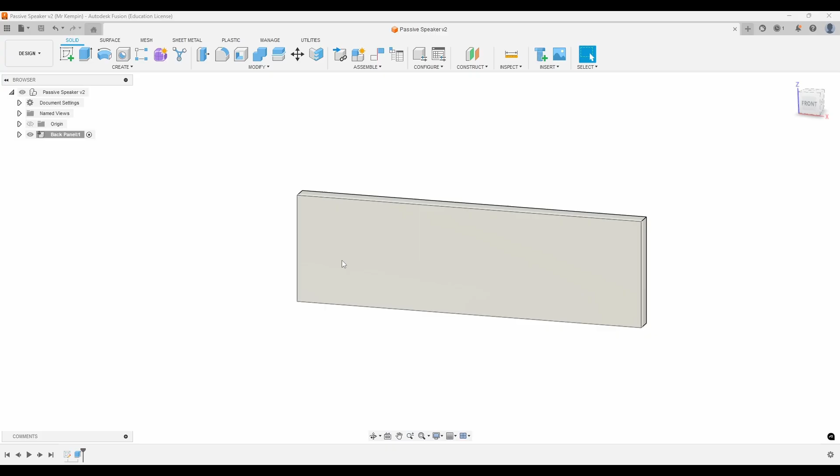The internal parts give it its shape and structure, bits that allow the sound to travel from the phone to the two separate chambers. These are really important, but they're also going to create spaces, so we've got to be accurate with this.

We're going to need quite a few parts to do this. Now you could in theory do this in one part and maybe break them down, but doing that does have risks, and we need to look at how we're going to make each separate piece in real life.

So we need to look at the components. Now last time I mentioned that the active component is the one we're working on, but that didn't mean a lot because we only had the one component. So now I'm going to go back to my passive speaker, select the whole assembly, and now I'm going to press new component.

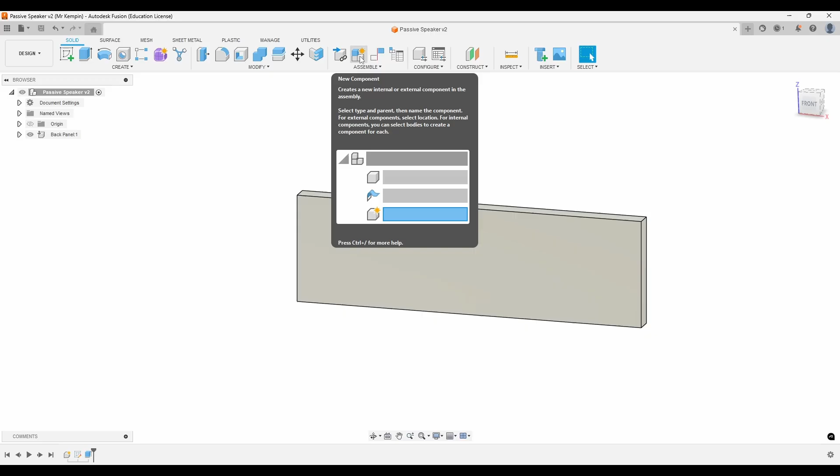This is really important that I do that first, because if I'd left back panel as my active component and pressed new component, it would have appeared inside the back panel component, which would have meant if we wanted to move it around or join it anywhere, we wouldn't have been able to. So my new component, which is going to be spacer 1, appears below back panel, not inside back panel. That's really, really important. This is one of the most common areas that people get confused with and get wrong. So make sure that these are separate components here, not dependent upon each other.

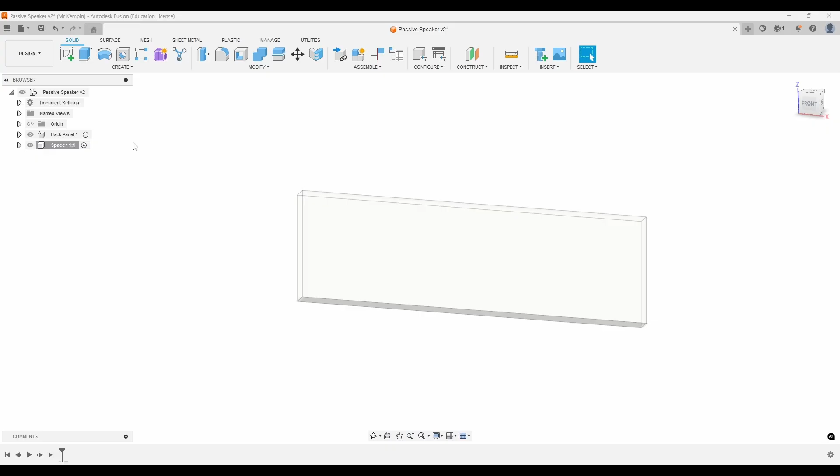So we need to make the first of our spacers. We're going to do the quickest and easiest one. I'm going to start with a sketch again, sketch on my front plane, and I just need a rectangle, and I'm going to do it below. It doesn't matter where you do this—you could do it on it, above it, left, right. We're going to move it around straight afterwards, so it doesn't matter.

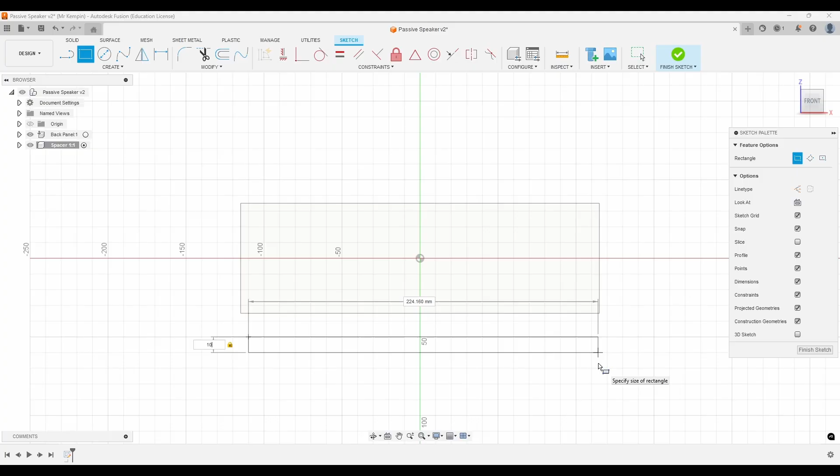What matters is that this height here is 10, and this width here is 230. I can now finish my sketch. I'm going to extrude it, extruding it 12. I just typed 12, and then I can press enter.

I'm done. So it's the same technique that we used for the back panel in the previous video. We're going to be doing a lot of that in this video. There'll be a lot of repeating that, but we'll get that skill drilled in, and that's really important—that's one of the things that I want to do with this, is get those basic skills drilled in.

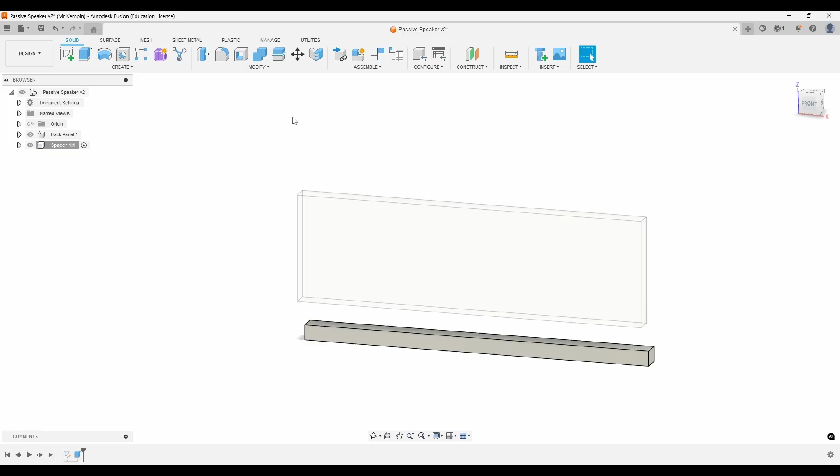So I can leave it with this as the active component, or I can go back to this one for the first thing we're going to do, which is a joint. You can go to assemble and then joint. I like to use the shortcut J. Just press J on the keyboard and everything becomes active, and it says, right, we're going to join them together.

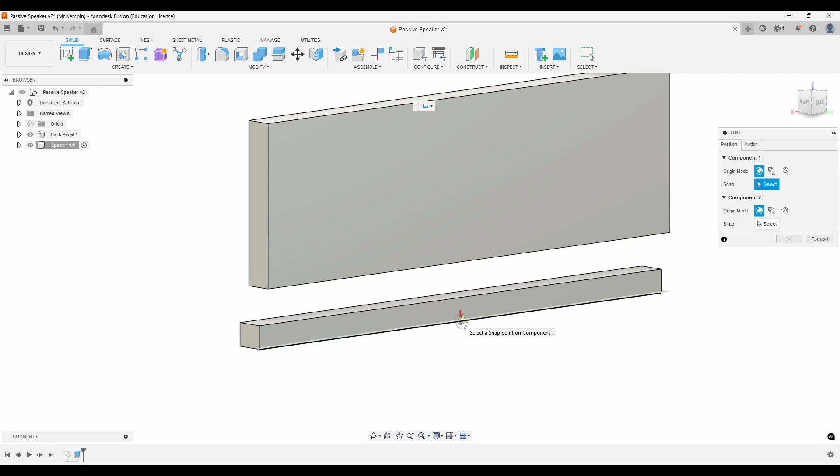So component 1—well, I'm going to swing around behind. I'm going to hover over this. I haven't clicked anything yet. Now what I want is that node there. If you're further away, it's sometimes hard to snap to the right node, because even though that's the right node, it's on an edge, not a surface. It has to be the surface for this process anyway.

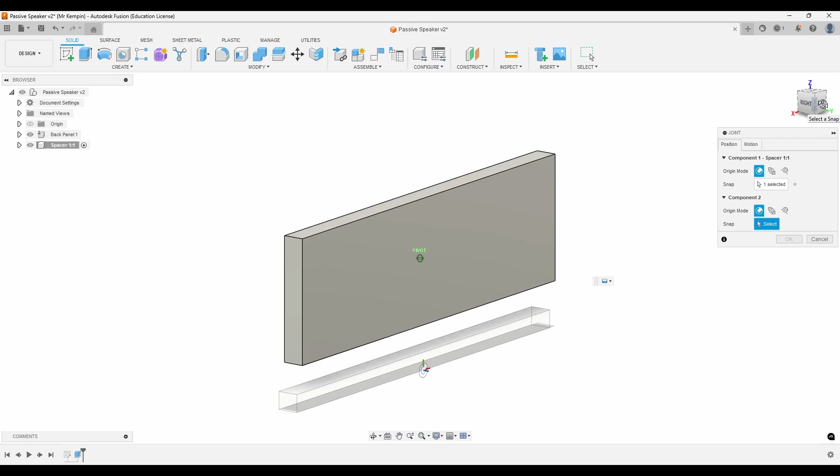So I'm going to zoom in much closer. I'm going to click on the surface, and then my mouse will only move to the nodes. Look, my mouse is quite far away from those nodes, but I'm moving up and down and selecting between the nodes, so I'm going to make sure it's that node I select. I'm then going to spin around. If you're wondering how I'm spinning around, you can either click on this directional block at the top and move it around.

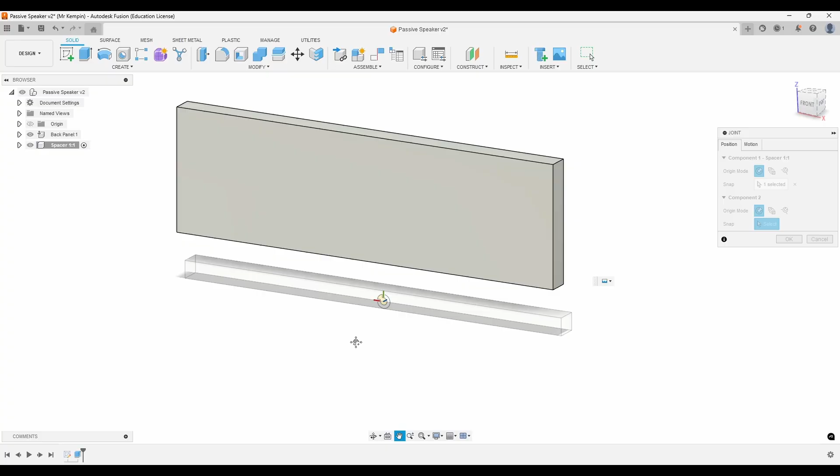You can press the orbit button down here and click on the screen and drag it around. Or you can hold shift and middle mouse button down, that's a shortcut to orbit. If you hold middle mouse button on its own and move it around, it's a pan or drag. Shift and middle mouse button together and you orbit.

For my next point, I'm going to snap to this one here. I'll zoom in a bit closer, click on the surface first, just for good practice, and snap. That is attached, and it goes back to being spacer 1, my active component. That's that bit done. We need to do this a few more times now for the spacers to go round the outside, up the middle, and so on.

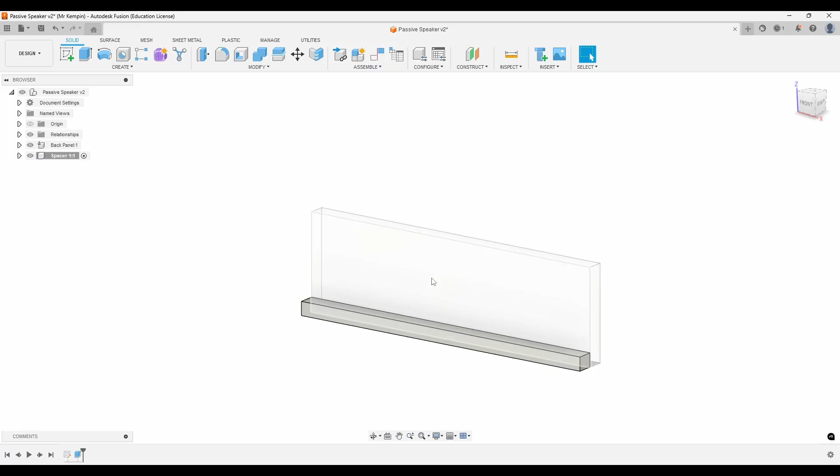Select passive speaker up the top there, make the whole thing active. One of the things I'm going to do now, because it bugs me, is click on open up relationships, where it says joints, this little annoying box here to show there's a joint here.

We don't need to see that at the moment. Maybe if we need to figure out which joint is which later on, because something's gone wrong, we can activate it. But I'm going to make that invisible, just hide it. The eye icon is a visibility icon. Doesn't mean it's not there. I can't physically move it, I can click and drag it, but it's not going anywhere because they're joined together. It's just not visible.

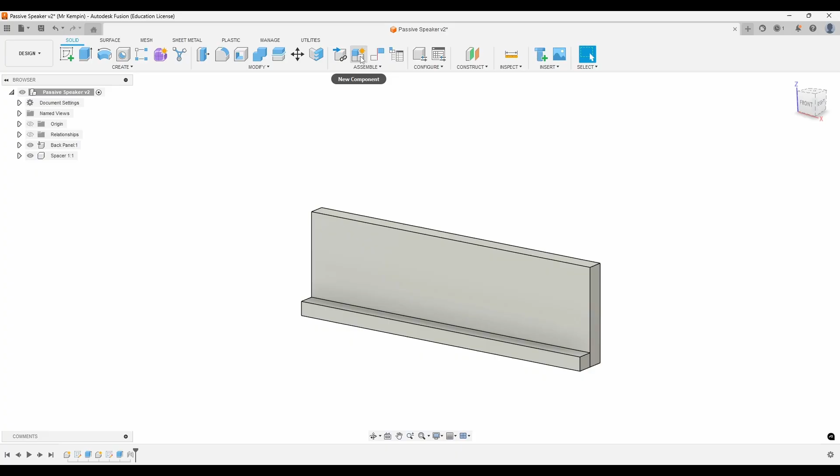Okay, I've got my passive speaker selected. I can now press new component. This is going to be spacer 2.

Now spacer 2, we're going to start doing the side ones. I'm going to do the one on the left hand side up here. So I need a new sketch. Doesn't matter what plane it's on, doesn't matter where I do it, but I'm just going to do it on the left because that's where it's going to go. It's going to make it easier for me.

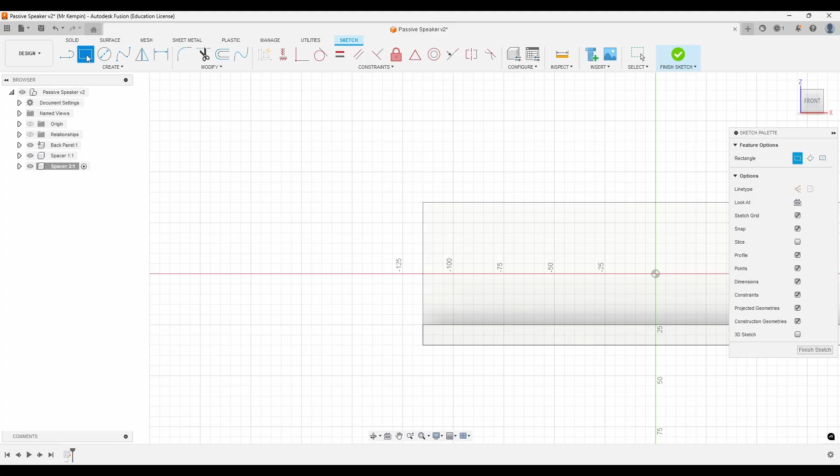Rectangle tool up here, shortcut to that is R. I'm going to draw my rectangle, and I want my height to be 50 and my width to be 10. And that's it, I can finish my sketch.

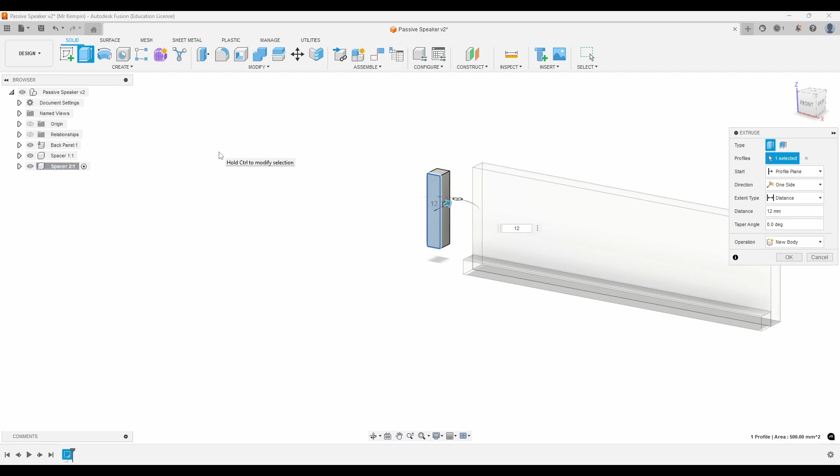I can press extrude up here, the shortcut for extrude is the letter E. So if I press the letter E, I can type 12 and press enter. That's nice and simple. I can now press the shortcut J for joint, or I can go to assemble and joint, and I can select.

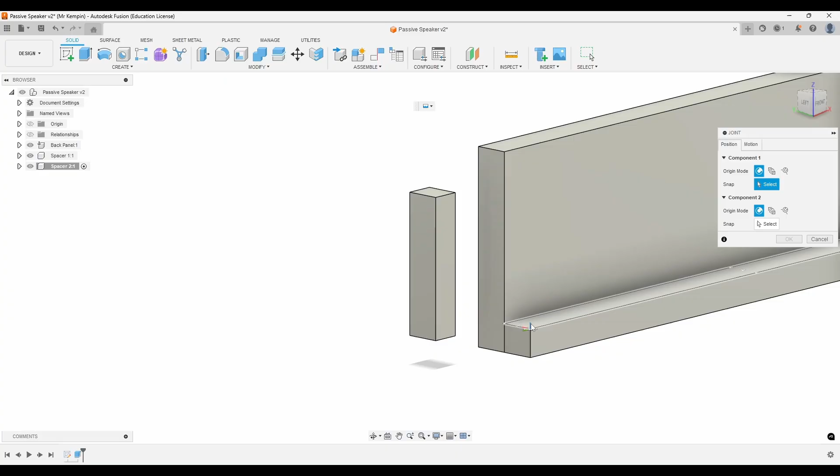Now we want this on here. Let's not assume that the middle is the middle, because we don't know yet. I do know, but we won't assume that. We could always joint it here. So I could say I'm going to joint this bottom surface and this node here, to this bottom surface and this node here. And that fits in there.

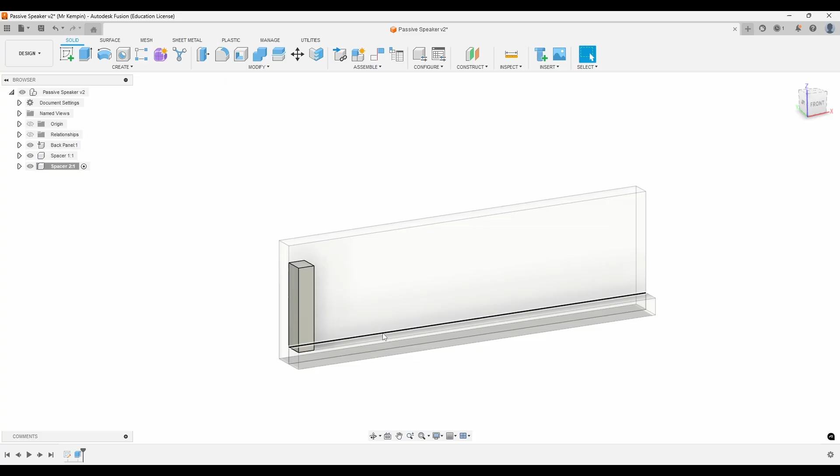There's more than one way to join things together, and it will impact dependencies. If I was to change the height of my first spacer and it wasn't so high, this would now move down with it. If I had jointed this to the back wall here and made that thinner, there'd have been a gap in between them. So these are things we do have to consider, especially for more complex designs.

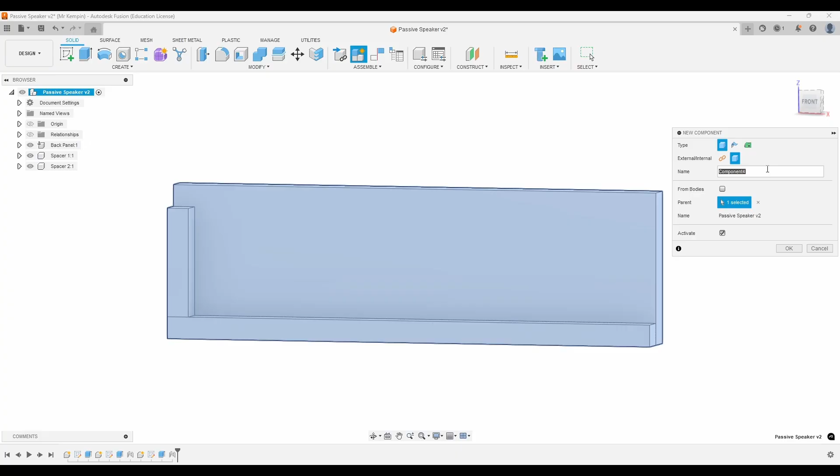Now I need the exact same thing over here. We have to do this as a separate component, otherwise they're part of the same component, joined together, even as far as spacing them apart. So I'm back in my passive speaker file and I'm on new component again. So this is spacer 3, and sketch.

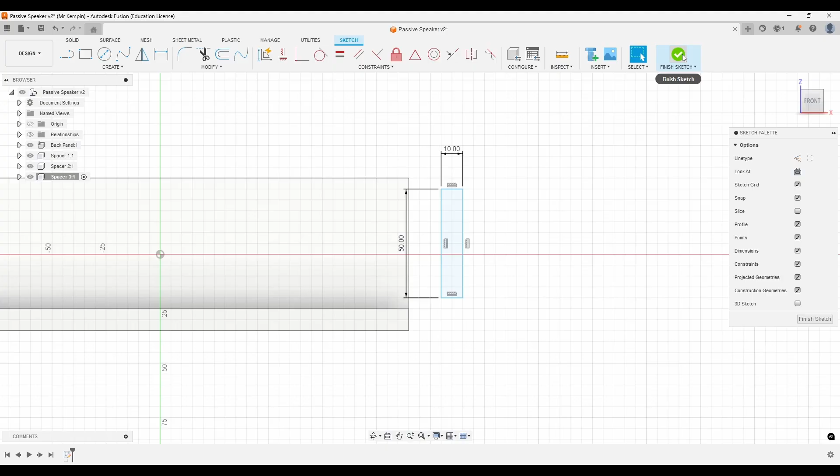Plane. I'm going to go over to this side, shortcut letter R for rectangle, start, move over, 50 high and 10 wide. I've finished my sketch now. I can press my shortcut E to extrude, which is up there, and it's 12mm thick. Press enter and done.

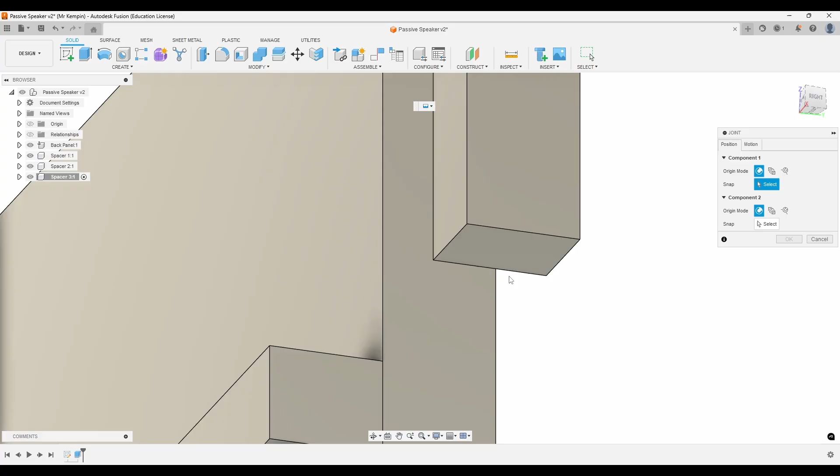I'm now going to press J for joint, and just like before, I'm even going to do a different one to before. I'm going to go with the corners. So I will go with this surface, and that corner will match up with this surface and that corner. There we go.

Easy. Back to the passive speaker. Now at this point here, I've done some stuff. I've got 3 new components in here. Always hit save. Don't try and get too much done without hitting save.

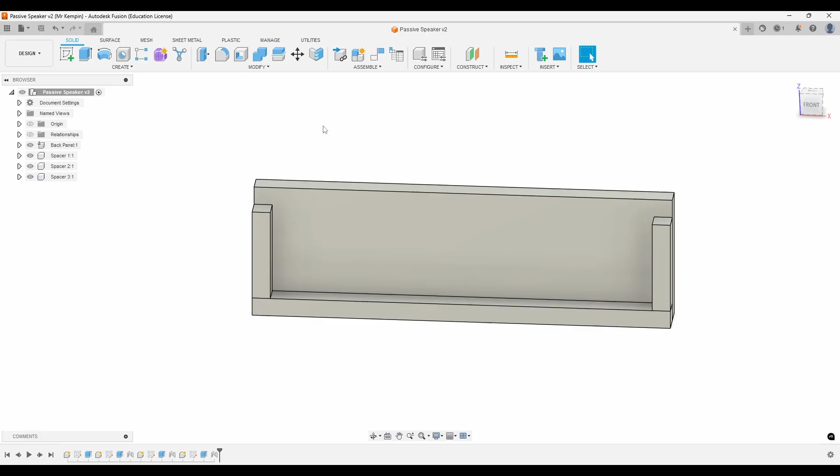Right, that's saved. I'm now going to hit my next component. So I'm going to go with the ones across the top here. So new component, spacer 4. Right, so these are going to go across the top here.

We're going to do a new sketch, same plane as we've done for everything else. And R for rectangle tool, going across.

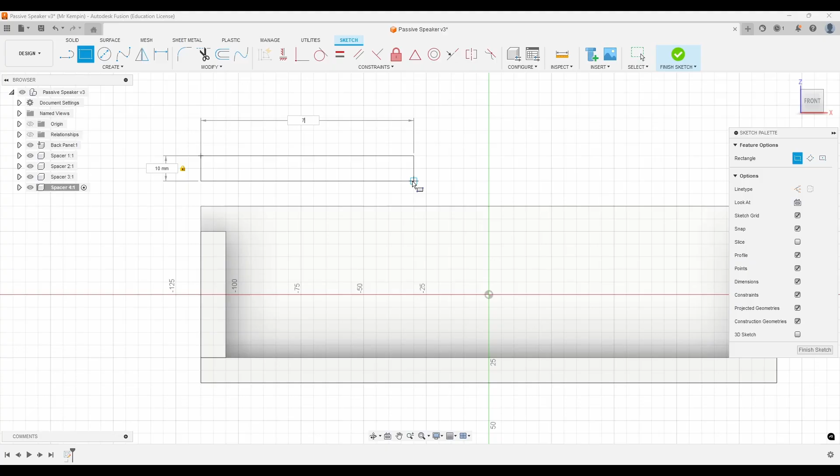I want it 10 high and 70 wide. I can finish my sketch, press E, press 12, enter is done, and there we go.

I'm going to press J for joint and have a look. Well, yeah, I think I'll joint it to the side piece.

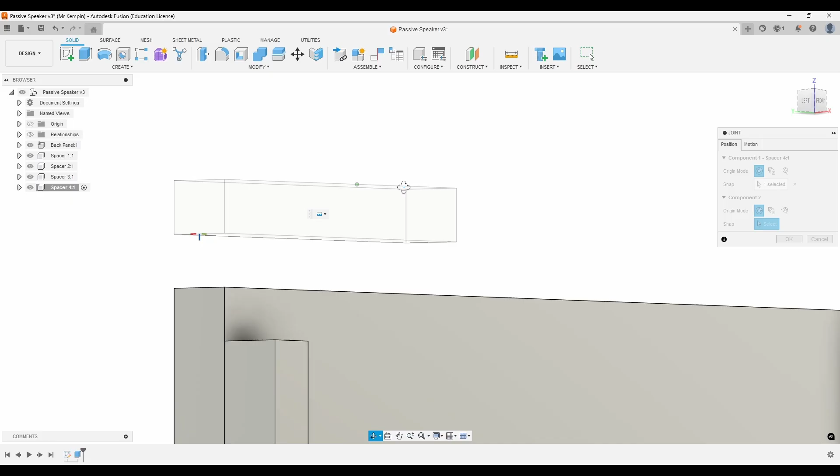So I'll select that one there and that one there. Press OK. And done. And do exactly the same thing on this side.

Remember, back to passive speaker. And then new component. Spacer 5.

New sketch. And then rectangle tool. Now height, 10. Tab. 70. Enter. Finish sketch. E for extrude. 12 for our thickness. Enter is done.

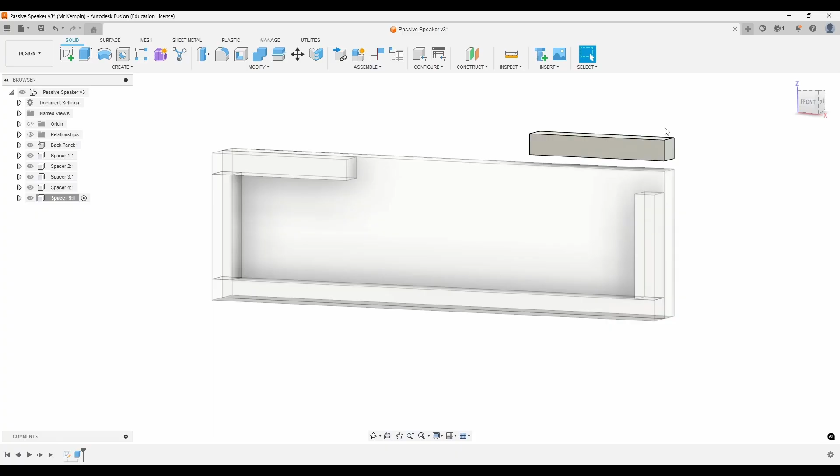J for joint. And I think this time I'm going to go with that node up there. And that node up there. Because I know that we're not changing any of the dependencies, that means we're not going to move things around in this.

If you want to try different jointing nodes and different jointing ways of doing it, please experiment, have a bit of fun with it, see if you learn something. If you get it wrong, you can undo it and try it again. That's fine.

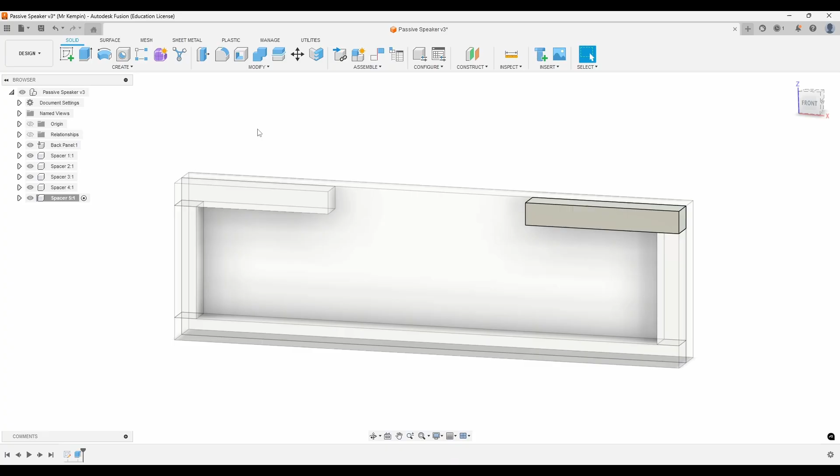Right, we've got those ones done. We've now just got the small ones, which are going to be the ones that come down here and across. Same on this side, and the one up the middle to separate them.

Now these measurements are important. They do have to be at the right height, otherwise your phone won't sit still. So, the first thing we want is the ones coming down here.

So, new component, so we've got passive speaker selected. And I know that that's selected because I can see everything fully. If I have any one of these selected, that's the only one I can see fully.

The rest go semi-transparent, almost ghostly, because they're not the ones in focus. I want everything in focus, because that's what I want it to be part of.

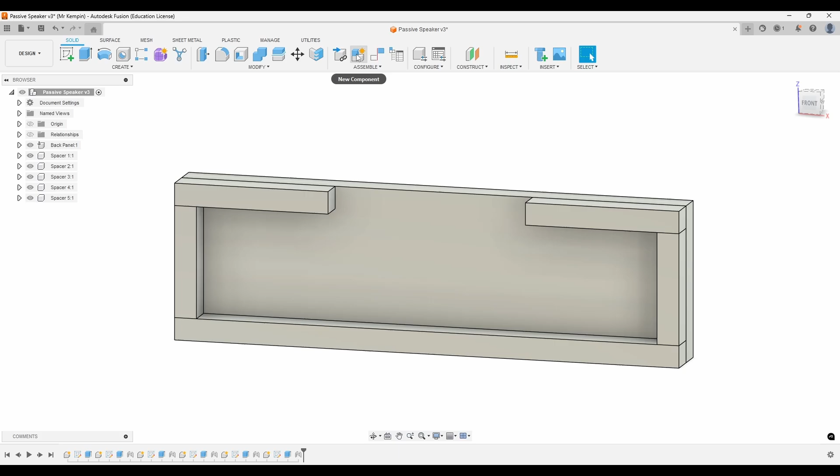New component, spacer 6, and same old process. Create sketch, pick my plane,

rectangle, draw it out. So height for this is going to be 30 and the width is going to be 10 like everything else.

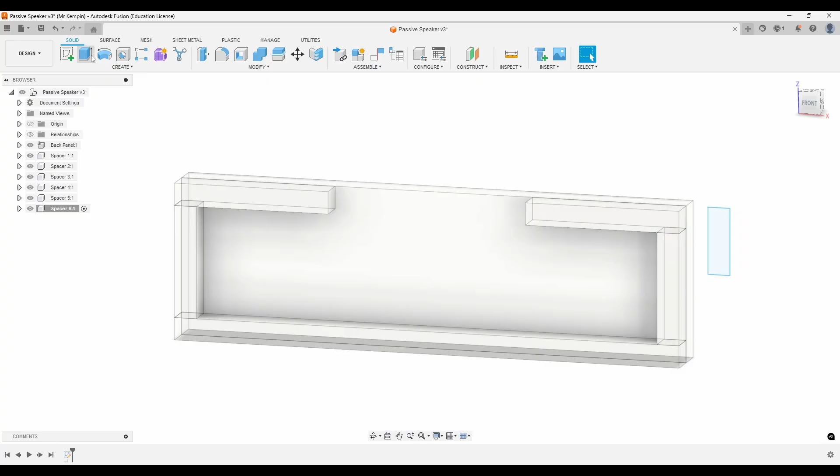Finish our sketch and then we can go to joint. Oh no, we can't. We need to go to extrude, distance of 12, enter. Nice and quick and easy.

So now we can joint it, and we need to join this surface here to the underneath of that surface there. Do not fall into the trap of trying to use the middle, because that won't work. I have to use the edges for this because we're going to an edge over here.

You could use the corner, you could use that edge or that corner. That's the edges you want to be using.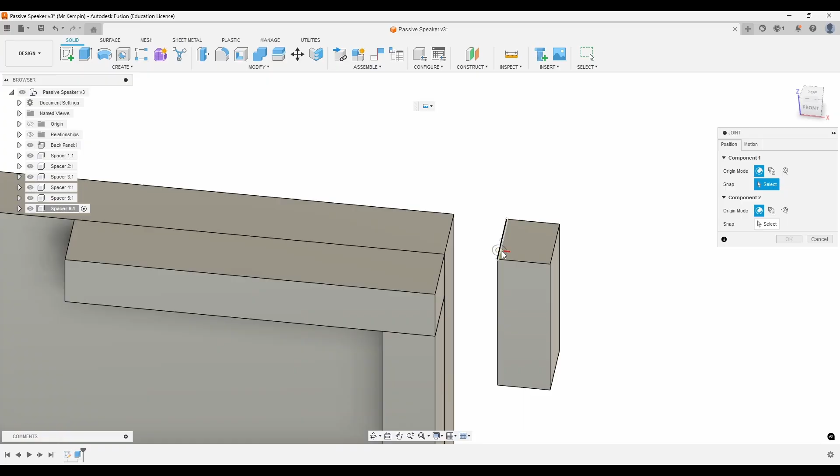So I'm going to use the middle one and join to the middle one there. Okay, that one's done. Right, we now need to do that all again.

Back to passive speaker as the active component. New component, spacer 7,

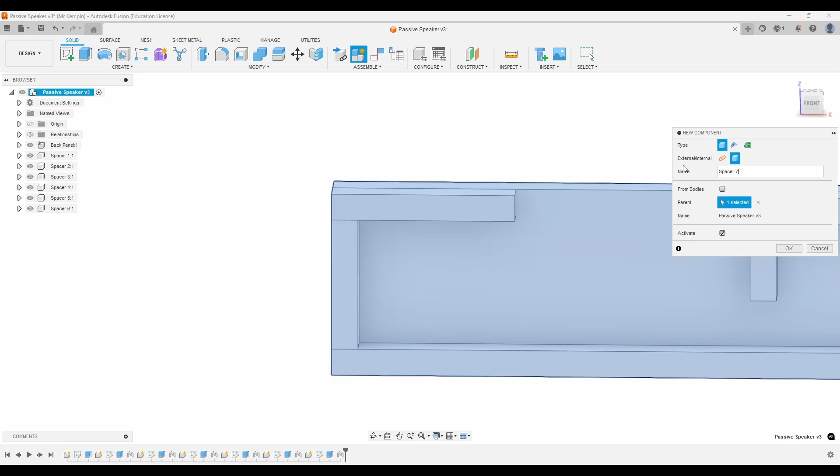create sketch. On that plane, I'm going to go over to the left, rectangle tool, rough it out.

This is 30 high and 10 wide. Finish my sketch, press extrude, type 12, press, oh that's 0, ooh, be careful with that, press enter.

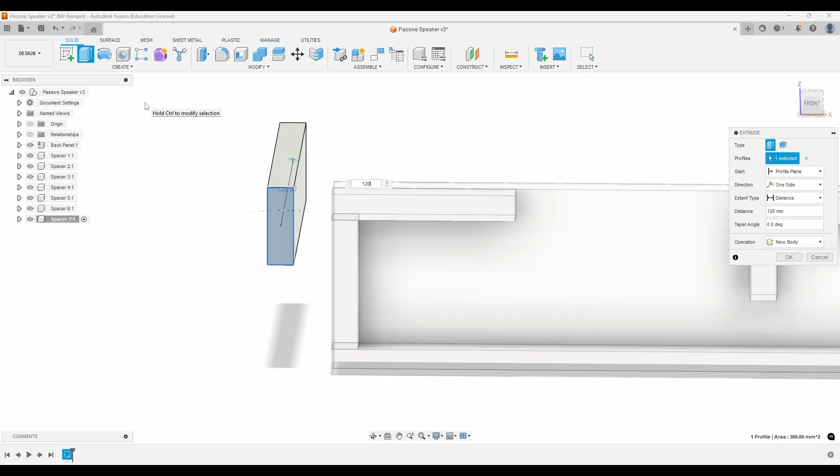I'm now going to press my joint button and I'm going to join that surface there, or that node there on that surface to that node there, and that's that bit there done.

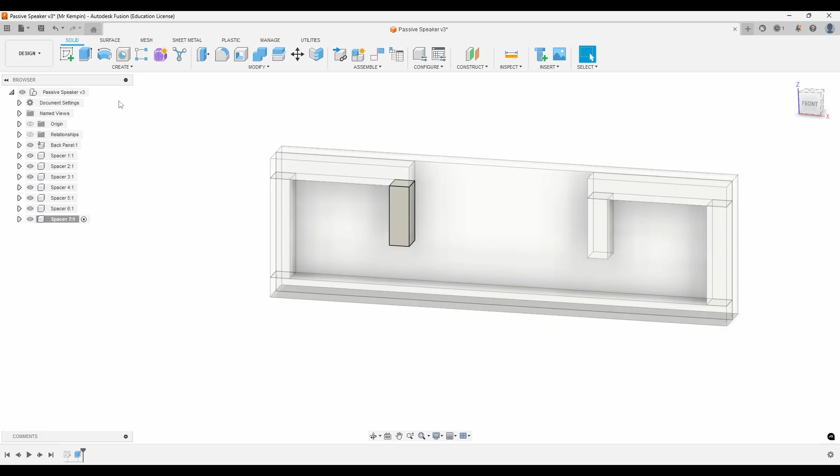Again, I've reached quite a significant point. I'm going to go back to my main body and I'm going to press save.

Don't want to lose my work. I've tried that before, it's a bad idea.

So now I need to do the bits that come across here and here. New sketch. Oh no, see, again I'm getting myself carried away from myself there. What didn't I do? I didn't create a new component. If I'd created that sketch, it would have been part of the overall document, and it would have formed a body that wouldn't have been able to be moved.

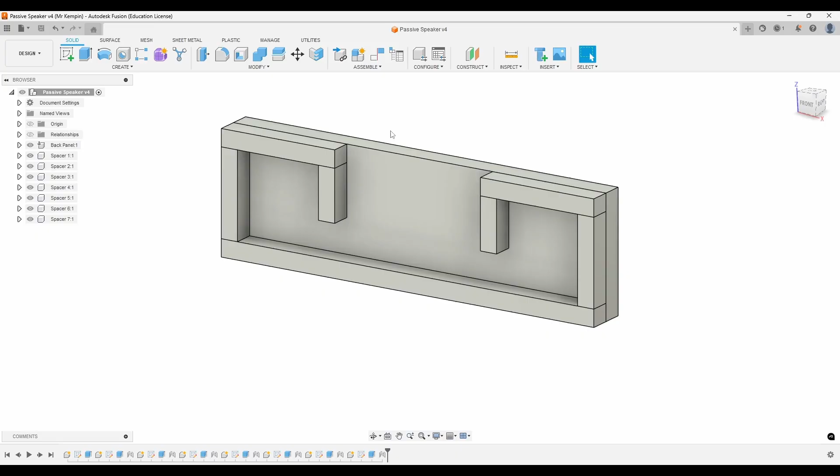So, new component, spacer 8. Now I can go to my new sketch. It's easy to get carried away and forget little steps. Pay attention to what you're doing.

So rectangle tool. Height is going to be 10, and the width is going to be 20. It's only a small part, very small part. I'm going to extrude that to 12. And then we're going to joint it.

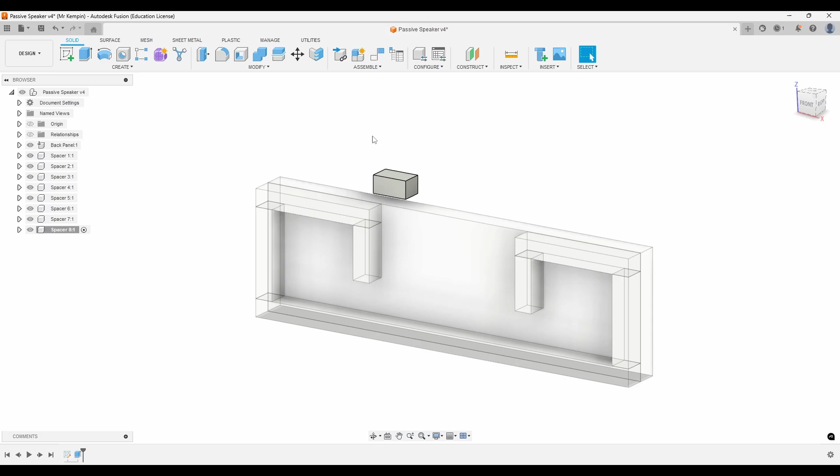Now this is going against this bit down here. So I'm going to join here to here. Okay, done. Now I need to do that all again.

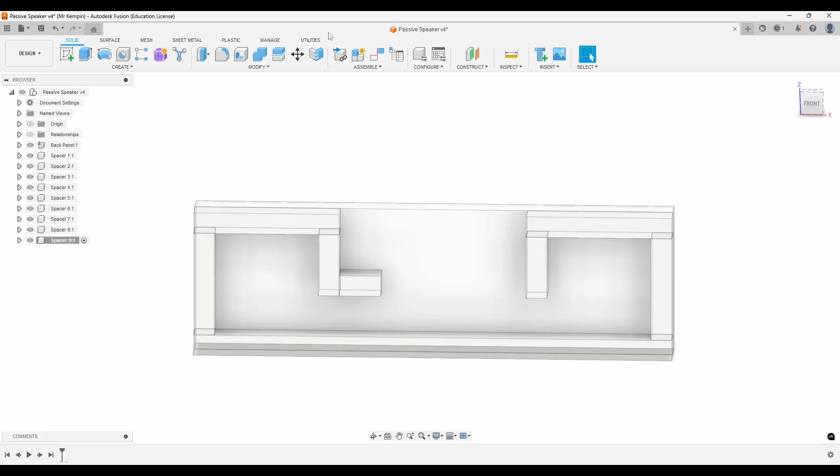So back to passive speaker 4. New component, spacer 9. And oh, I seem to have a thing lodged on my screen there. There we go, disappeared now. Strange when that happens. New sketch.

That surface there. Rectangle, 10 high, 20 wide. Enter. Extrude, 12. Enter. Right, I'm going to show you something a little bit different that I haven't shown you yet.

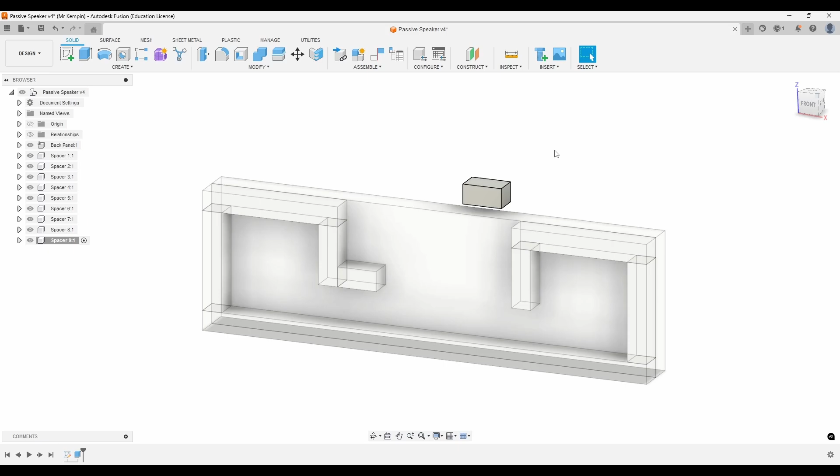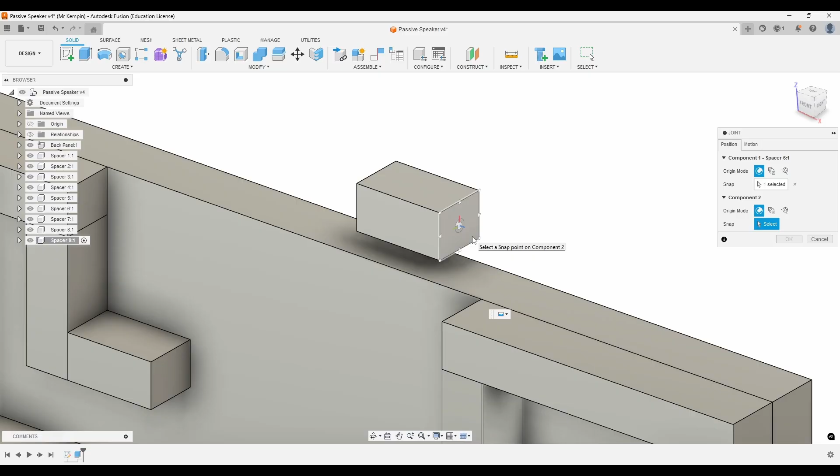The order in which you select the parts that you're going to be jointing can make things look strange. Every time so far I've selected the part I want to move first and the part I'm moving to second. If I do it the other way around, we'll do that node there. When I select this node down here, this part may sometimes move.

It's moved away from everything else. If this happens, this is a likely cause of confusion and worry. I've seen students see this happen and think all their work is messed up because something's moved on their screen they didn't expect to move.

Nothing is permanent in Fusion. You can undo things if it goes wrong, you can edit things. All it's showing you is how it's going to look prior to it being assembled.

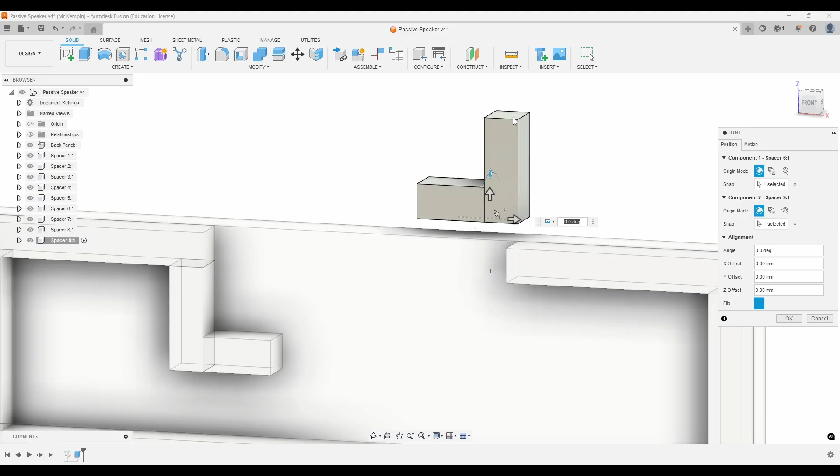We know that this one is already attached to here. It can't be up here and be attached to there. So the obvious reason behind it is it's just showing you how it's going to move, and then everything's going to move back to where it should go. When I press OK, this will go back down here, and there we go, voila.

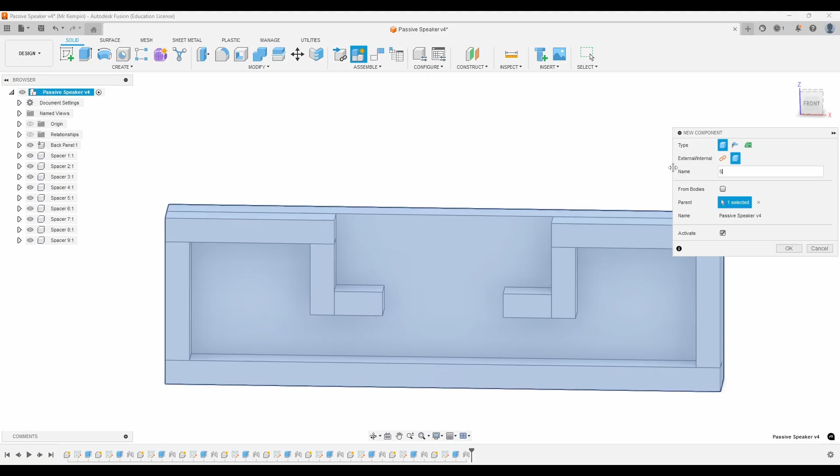Don't panic. Right, one last spacer to go. So this one is going to go from here up to here. We'll do a new component, spacer 10. And new sketch on here.

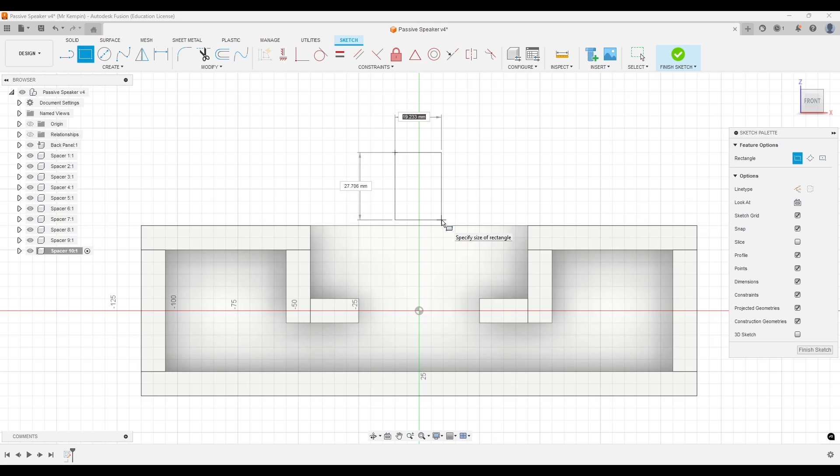And now we need to do our rectangle. I'm going to do mine just up here. See the width there, 10 on our width and 30 on our height. That should get us from just this bit here to here. Finish the sketch. Extrude my depth to 12. And now I can joint it.

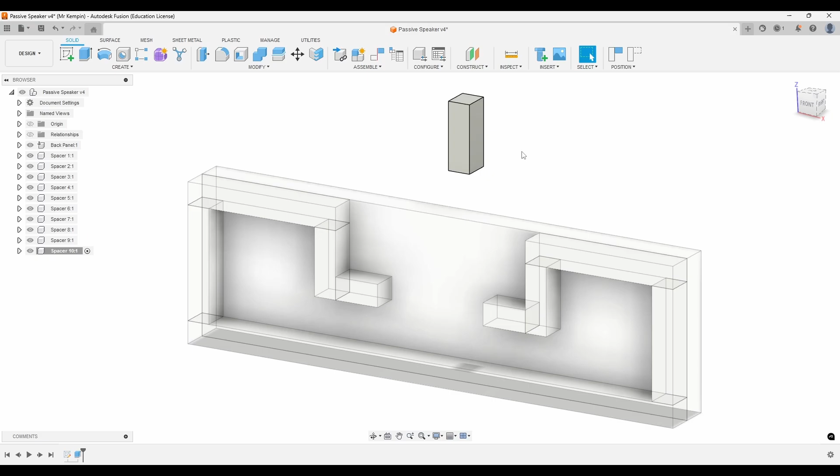Now, actually, I'm going to have to cancel that because I can't do my joint yet, because it looks like I can't access that bit under there. I'm going to click and I'm going to drag and I'm going to drop it. Great thing about Fusion, before you joint it, you can click, drag and drop things anywhere you want them to be. So now I'm going to joint it.

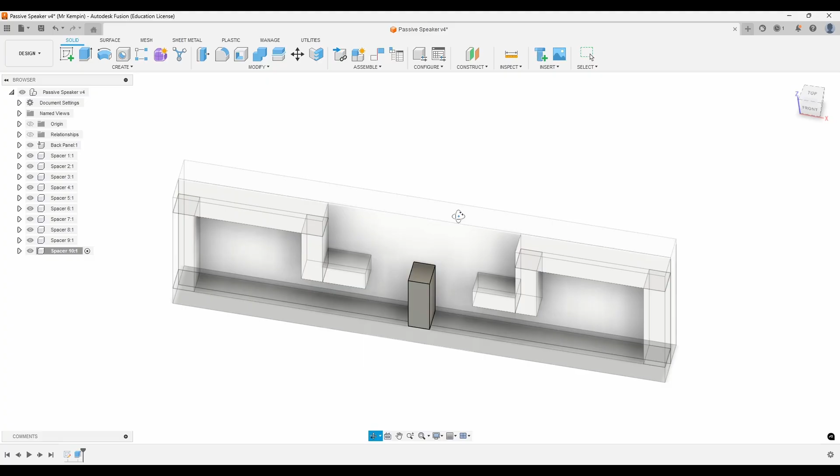Now it's going smack bang in the middle, so we can use the smack bang in the middle node. Quick, simple and easy. Go. Okay, and if we have a look, yep, everything sits lovely.

Right, go back to our main document and I press save. If you need to pause at any point and save it, save it. Right, that's the middle layer done. In the next video, we'll look at the front layer, then we'll look at the sides after that. Okay, good luck.